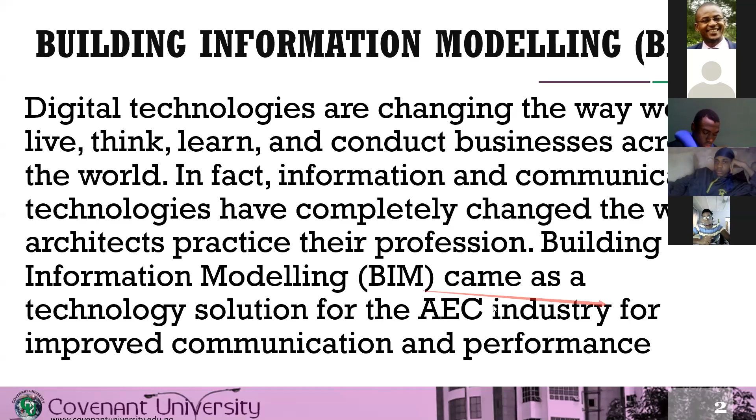BIM can be defined as the process of creating, using, and maintaining digital information for the integrated design, construction, operation, and maintenance of building. Simply put, BIM is the means by which everyone can understand building through the use of a digital model.

I will explain this in detail now. If you look at this definition, it says that BIM can be used for the following purposes. I want you to know this. And understand that all that time you sit before your system using Revit, what interests you is how you can produce 3D impressions or stuff like that. That is way, way beyond what you can do with it.

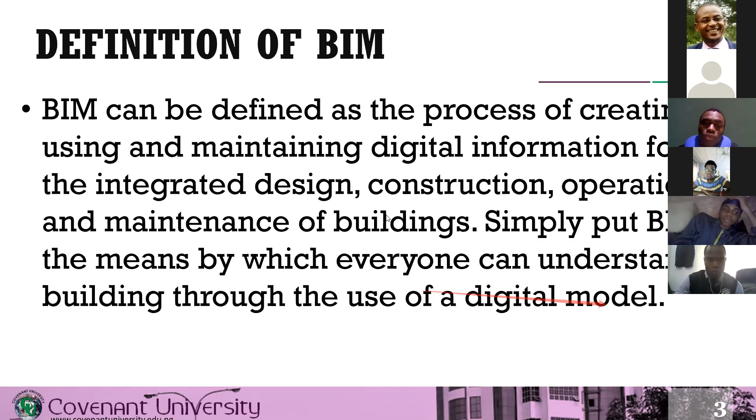Now, we need to look at what we consider to be the key features of these tools we're using for our design. One of the key features is that it provides the information content that defines a product—that's your building. And then it also gives product properties such as thermal performance.

Meaning, as you are designing, as you go to your family folders and pick each element that you're using for that design, the properties associated with those elements in real life are embedded in that digital model. What am I trying to say? Take a wall in your building—that wall has its load-bearing capacity, it has thermal properties, different things embedded in that wall that you can easily extract.

Now, in that same model, assuming you have a door, the thermal properties of that door, the fire ratings of that door—they are embedded in that door that you picked and placed in your model.

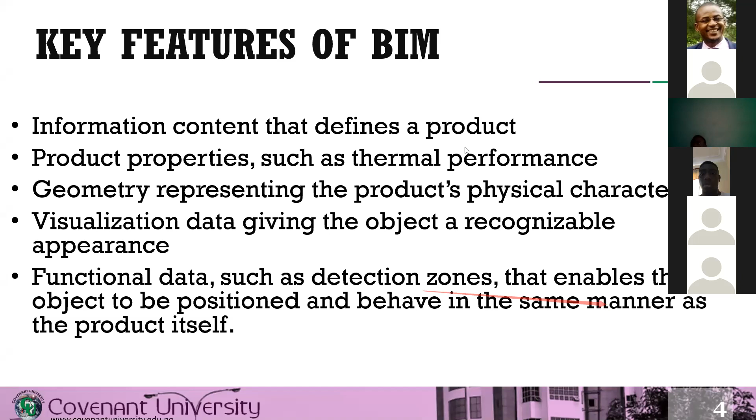Now I want us to look at the key benefits of BIM. It gives us the opportunity to do analysis of structural and energy performance in the design phase.

You need to understand that most of the things we do in design are based on residual knowledge. So how wonderful is it that you can profile your design and subject it to all kinds of analysis under different conditions, and the result you get will be as if that house is already built and you're doing it on that particular house.

It's important that you understand, as architects, these things are not just for you to use to do your 3D. It goes far much more beyond that. Also in your planning, 4D sequencing, and conflict checking in the construction phase, you use these tools. You're still in 300 level; as you progress to 400 level, MSc1, you'll start seeing different kinds of BIM tools for different aspects of the work.

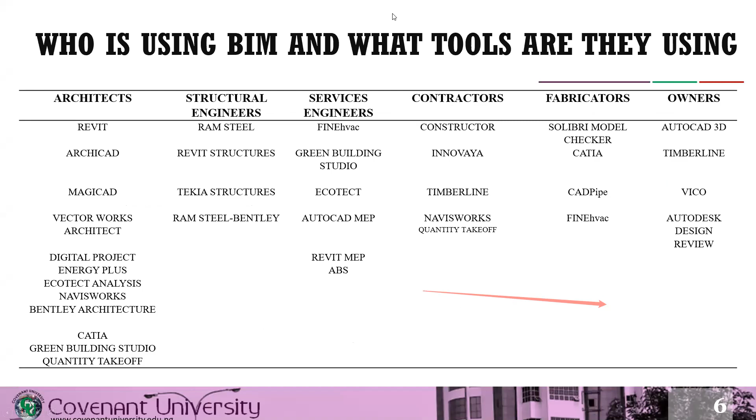Also, just like I tried to explain earlier, for facility management, knowledge, and updating records of events in the use phase, the people managing the building should be able to have a database that tells them every single thing, every single material that is in that building.

When anyone is removed, once they go back to this document, they can know that this thing is supposed to be there but is no longer here. So in facility management, they leverage BIM tools to do their work also.

So you see, as an architect, anytime you are comfortable with a design scheme, when you sit behind a system to design that particular building, you need to know that at the end of the day, these key benefits, these key features that have been listed here can be profiled on that design that you just did.

You can analyze the structural integrity of that building. You can analyze the building in terms of energy performance. You know exactly what is happening.

At the end of the day, if I'm looking at energy, what is the level of illumination in this interior space? This building that will be oriented in this way, using this type of building envelope, maybe glass, maybe wall, maybe small windows, maybe large windows. So what happens? How would the lighting impact the interior space?

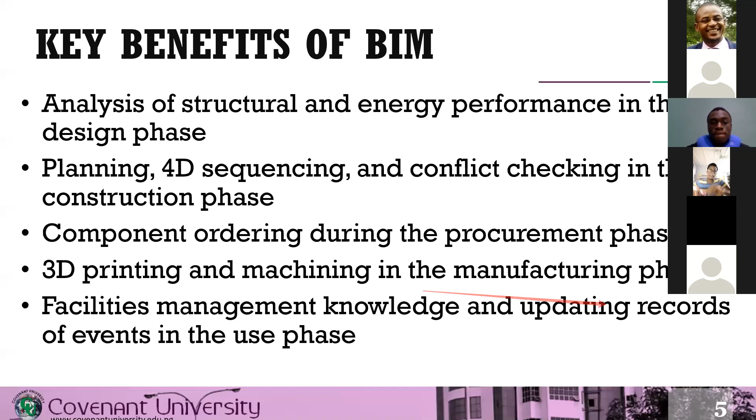If you look at this information here, it just tells us about who is using BIM and what tools they are using. When you look at architects, you look at Revit, ArchiCAD is a BIM product, MagicAD, Vectorworks Architect, Digital Project, Energy Plus, Ecotect Analysis, Navisworks, Bentley Architecture, CATIA.

CATIA is the one that was used by Frank Gehry and the rest of them, the people who started designing in the digital realm. They were the people that had access to this. CATIA is also used for aircraft manufacturing and stuff like that.

And then you look at Green Building Studio. Green Building Studio can be used for energy analysis and the rest of them. And then quantity takeoff, which can be used to generate quantities on a project, meaning you can hand over this information to anybody and they can generate the quantities of that particular project for you.

Assuming that you're the project manager of that particular project, you can use these things to check whether the information they're giving you is accurate or not.

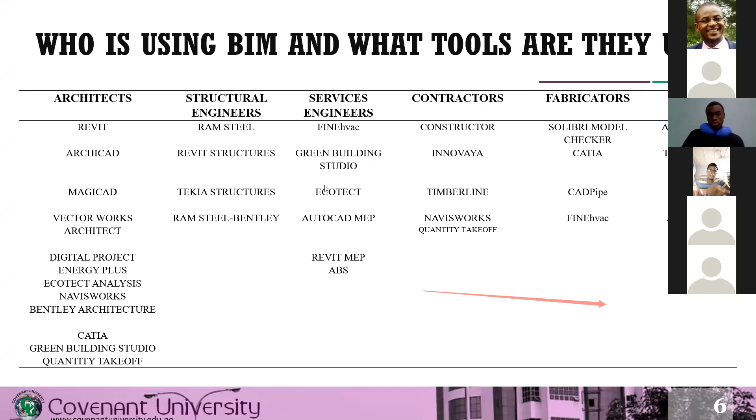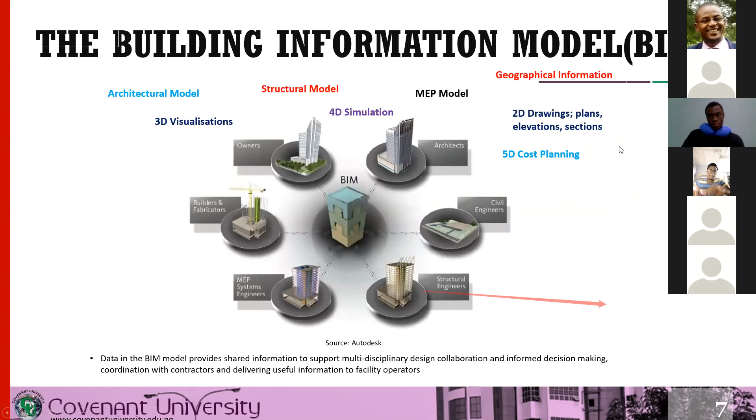I want us to look at this. This gives us an overview of what is in this concept that we are embarking on now.

You can see that in the center, that's where you have the composite model that contains the whole information needed for this particular project. So now, from this same digital model, you can extract your 2D drawings, your plans, your elevations, and your sections. That is what you call working drawings. You can extract them easily.

And then you also need to look at your 3D visualization. These you can extract from the architectural model.

And then you also need to look at your 4D simulation. This talks about construction sequencing, which you can easily extract from the composite model.

Then you need to talk about 5D. 5D talks about the cost planning.

And then you need to look at 6D. 6D talks about energy and lighting analysis, sustainable designs in the project, being able to take advantage of the weather data for that environment, and design and profile the facility in terms of functionality.

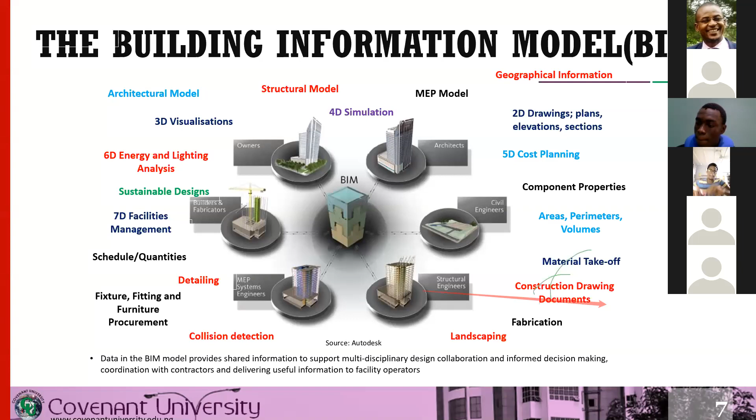You also need to know the location for this building, and how the conditions of that particular location will impact this project in terms of weather, and also the conditions of the ground. Is it solid ground? Is it marshy ground? Is there water, is the earth loose? All that information is what you extract from the site.

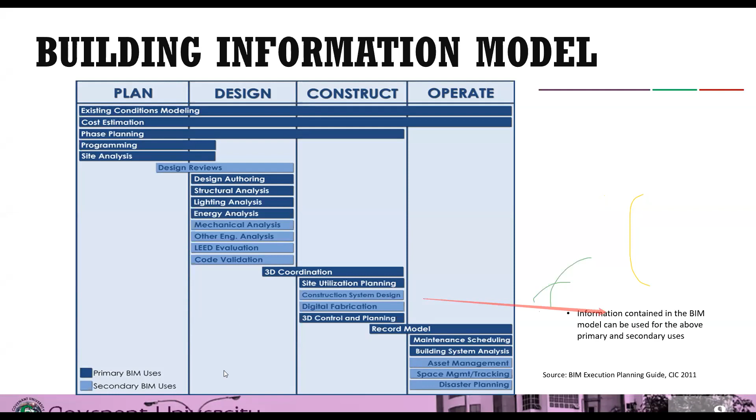I'm seeing some questions. Some people were asking if SolidWorks is a BIM tool. SolidWorks is a BIM tool, but it's not meant for architects. I know that your CIT classes sometimes back were forcing people to do it, but it's not compulsory for architects to know how to use SolidWorks.

So what we just did here is to show us the tools that are part of BIM tools. ArchiCAD, yes, it's part of BIM tools. So whether ArchiCAD is outdated or not, I cannot be able to answer that. But one thing I know is that BIM tools under Autodesk are the industry standards globally today. Not that they are the only ones that have BIM tools. ArchiCAD is one of them. Bentley architecture is one of them. Even in China and Japan, they have some that they're using in their climes there. But the industry standard globally is Autodesk because of the interoperability between each of their tools.